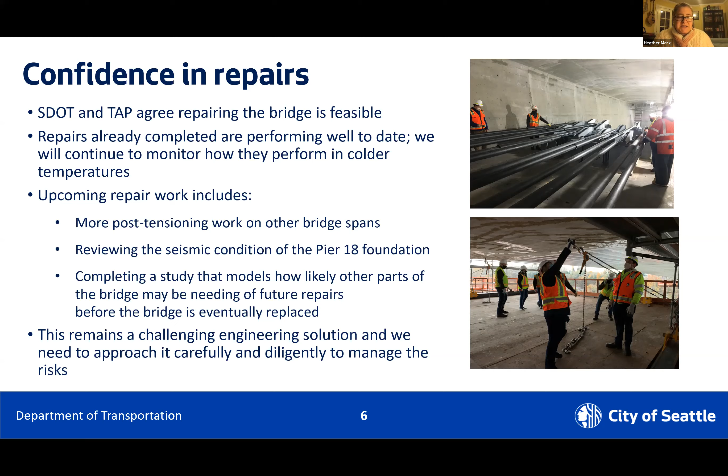SDOT is going to begin the alternatives analysis, that first stage of the type, size, and location effort we'll engage in. It's critical now to maintain the low bridge and other key infrastructure as we move into the serious repair. The city is also advocating for redundant modes of travel in and out of West Seattle, and we'll be working with our friends at Sound Transit to talk about how their bridge and our bridge may complement one another.

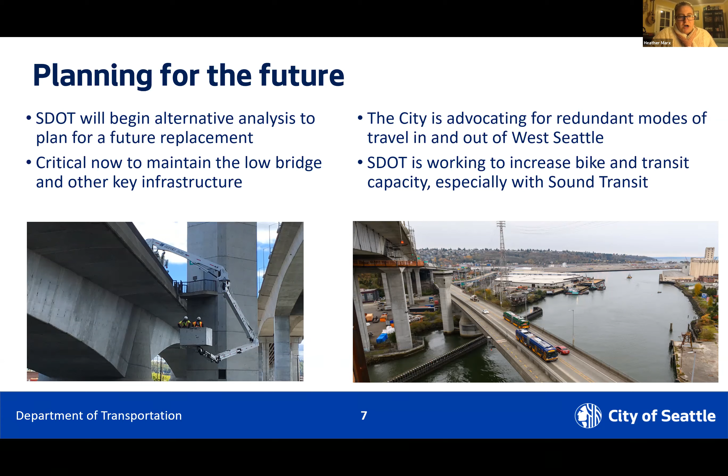You see some pictures here. The first is a picture of what we call a UBIT, which stands for Under Bridge Inspection Truck. It's a pretty cool piece of machinery that has an arm that reaches out and underneath so we can do that eyes-on inspection. And then a photograph of the low bridge with buses going across it, and you can also see where the platforms are that we've performed some of that carbon fiber reinforced polymer wrap work.

I'm very happy now to answer any questions you have with varying degrees of candor. Once we wrap up this element, we'll move on to talking about West Marginal Way. So, are there any questions? I don't have anything yet.

Well, Kate, you know you can count on me to come back, and you know how to get in touch with me if you have a question. Actually, I will jump in if nobody else has one. The ramps and the Spokane Street Viaduct, what's the lifespan on those parts that connect to the bridge?

The Spokane Street Viaduct, the ramp that connects it to the high bridge, just all the connecting bridges that get you to and from. Yes, generally we design bridges for a 75-year lifespan. If I were a structural engineer, I could be a lot more specific about that. The Spokane Street Viaduct was recently widened, and as part of that project, I am confident they made some additional strengthening to make sure it could carry that additional load of the wider structure.

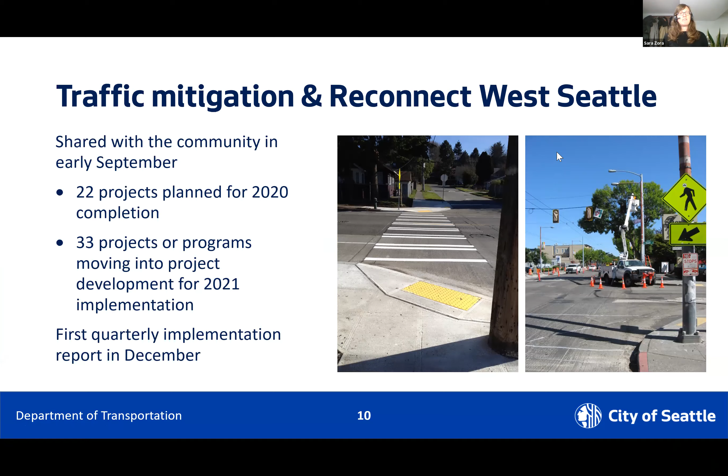Okay, so we're here to talk about West Marginal Way. Michael, I know you had talked about volumes and speeds. I looked back and saw that we hadn't really talked a lot about West Marginal Way as a whole with this committee, so I'm here to do a little bit more than just volumes and speeds. As you guys know, West Marginal Way is a pretty critical corridor right now.

It is one of the detour routes from the closure of the High Bridge. There are very significant challenges with this corridor: very high speeds, a need for better safe accessibility and access to the Duwamish Longhouse, issues at the West Marginal Way and Highland Park Way intersection, and concerns from freight communities about access to and from their businesses, especially on the riverside, the east side of the corridor. There are also some missing links in the pedestrian and bicycle infrastructure and network that we're looking to connect.

I would like to remind you that since that closure has occurred, we have seen volumes increase here as well as speeds. The five-way intersection really is still that constraining factor for that southbound movement from the five-way—there's just that one lane and then it opens up into two. I'll get into some of the existing conditions as we move forward.

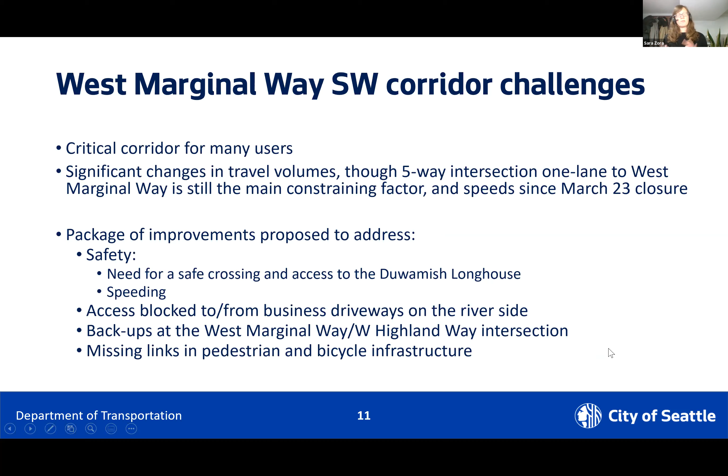Next slide, please. So we have some things that are definitely coming in and have already been installed in 2020, and there are some things coming in 2021, and some things still being discussed that potentially could come in 2021.

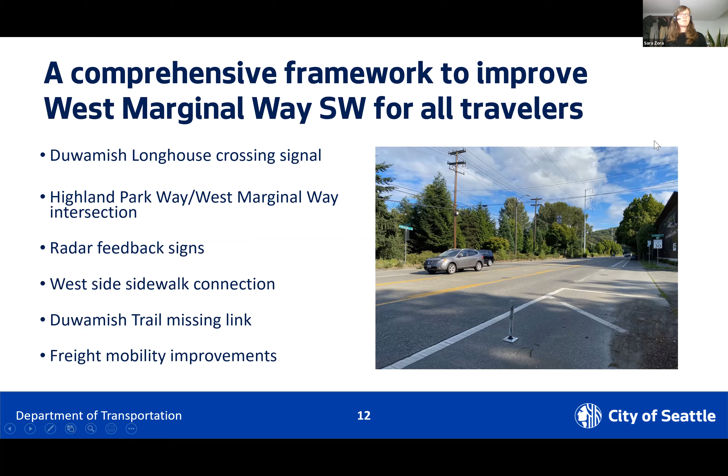So, next slide—the first thing I wanted to talk about was the Duwamish Longhouse crossing signal. This has been a pretty important project for the Duwamish for quite some time now, as you can see from the history on this slide. They have events there, parking isn't very accessible, except for the lane drop that we built out in 2019.

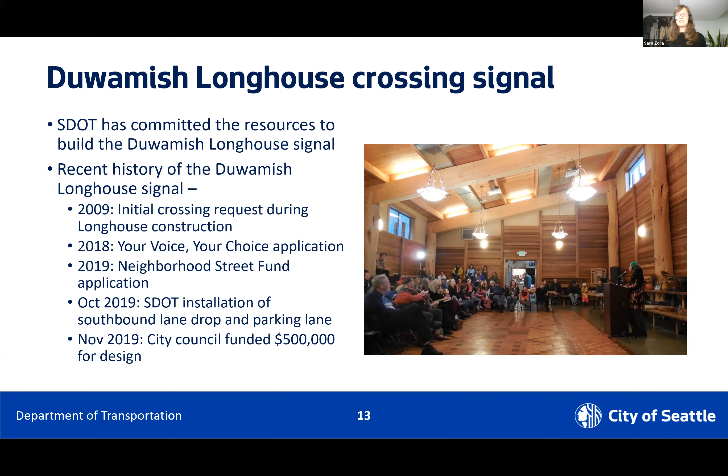Through Reconnect West Seattle, we have committed to funding both the interim and the permanent signal. There will be an interim signal that we have a huge desire to build in 2021, which would really increase safe accessibility to the Duwamish Longhouse across West Marginal Way. They have some parking on the east side, and we hope there will be a permanent installation for the signal in 2022. So that's one thing definitely coming up in 2021, that interim signal, which is a really huge benefit for the Duwamish Longhouse.

I just saw Deb's comment in the chat that City Council actually committed to funding this. We were committing to funding it out of Reconnect West Seattle funding, and now I think there's actually more funding for it from City Council today. As you know, they do their final budget, I think this coming Monday. It's very interesting, and we love that this is going to be definitely funded and provide some good safety for people coming to that cultural center.

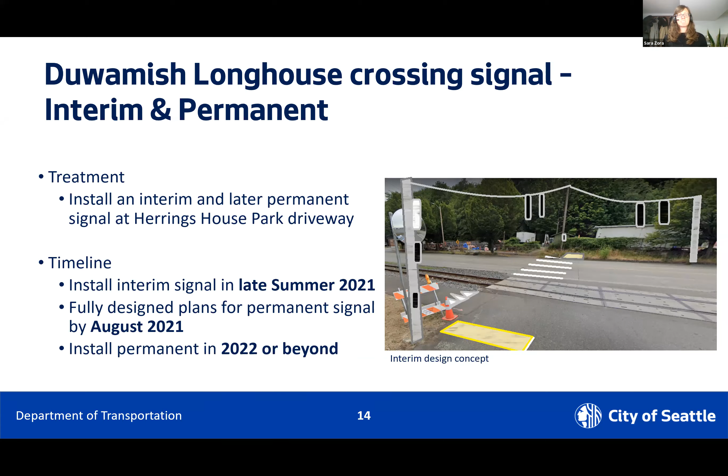We have completed two different projects in 2020 so far. We have installed six radar feedback signs. As you know, one of the challenges on this street is pretty high levels of speed, so that was one of our ways to try to educate people about how fast they're going and make sure they understand the speed limits, as we have reduced that speed as well.

We have also done some interim intersection improvements at the Highland Park and West Marginal Way intersection. We have redone the channelization at the intersection of Highland Park going eastbound, passing through the Duwamish. So we now have a right turn lane and two through lanes, and we have some after studies coming on what that looks like, to see how efficient we've been able to make that intersection flow a little bit better for motorists.

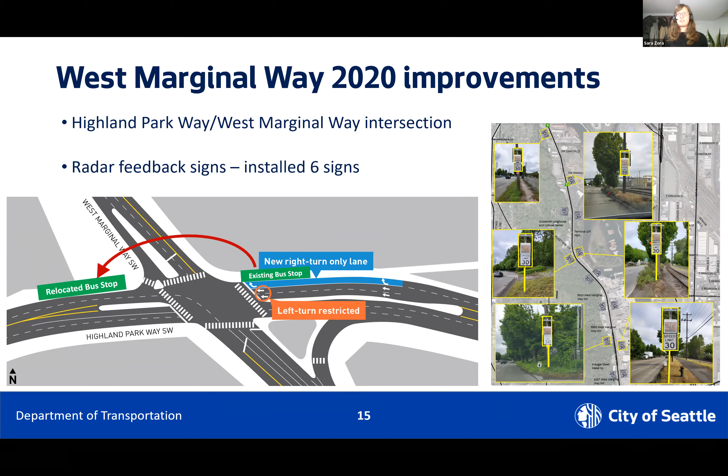In 2021, we will be looking at all the concrete — the non-engineered term I use is pork chops, you know, all the concrete rises that you see in the picture — just to see if there's any more efficiencies we can deliver at this intersection, being one of the major detour route intersections that we have been carefully monitoring.

So here's some of the 2021 improvements. We are committed to doing this west side walkway connection. If you look at the map on the right side of the screen, it goes from the existing half signal just south of South Idaho Street to the Duwamish Longhouse. This is a really important part. Right now, if you look at the picture, it's kind of like a goat trail — there's not a good, safe, accessible place to walk. So that is one of our commitments to building in 2021.

The things still in discussion and under more analysis are what to do with the roadway itself. We have two more things we were trying to commit to in order to get connectivity for our most vulnerable users, those walking and biking, and then some freight mobility improvements. We had proposed a northbound freight access, a FAB lane — a freight and bus lane, kind of like a transit lane — but we have taken that off the table. It didn't really interest a lot of people, and people were quite concerned about it. We are still working with the entities along both sides of the corridor to see if there are different freight mobility improvements we can make, especially in terms of safe access in and out of the West Marginal Way businesses on the east side where larger trucks come in.

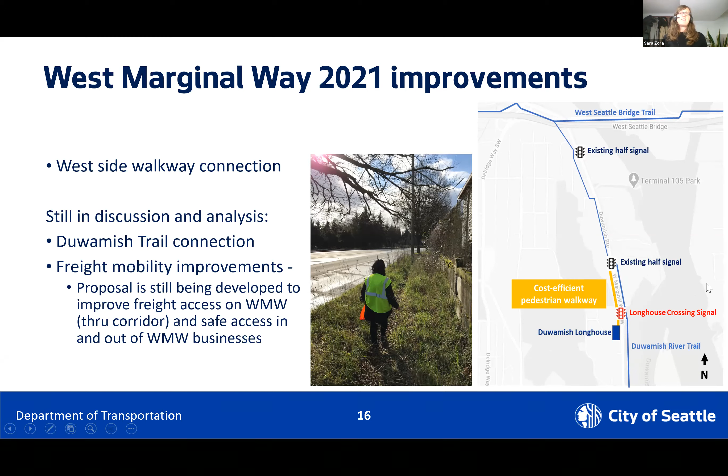If you go to the next slide, I did want to talk to you guys about what's happening right now with the existing conditions for the southbound travel lanes. I'm really going to focus on southbound travel lanes right now because that's where the proposal is causing some of the greater conversation, I'll say. So right now, the lane drop that occurs, as you can see with the delineator posts and the paint, is really coming up at the corner of around South Alaska Street. This is really where we have the lane drop that goes from two lanes to one lane.

If you go to the next slide, Madison, you'll see that starting at the north end of the corridor at the 5-way intersection, we have that constraint of just one southbound lane up until the first existing half signal. Then the southbound lanes open up into 2 southbound travel lanes, and at the next existing half signal going southbound on South Idaho Street, it starts to merge about 100-200 feet after that into the lane drop situation, which was put in back in 2019.

This was done for some ability to have different bus and ADA parking along the Duwamish Longhouse, and some better accessibility and safety for them to get in and out of their driveway, which is in the picture right here.

After that, it opens up again into 2 lanes for about 1.5 to 2 miles until you get to the major intersection at Highland Park Way and West Marginal Way. So that's the existing conditions we're looking at.

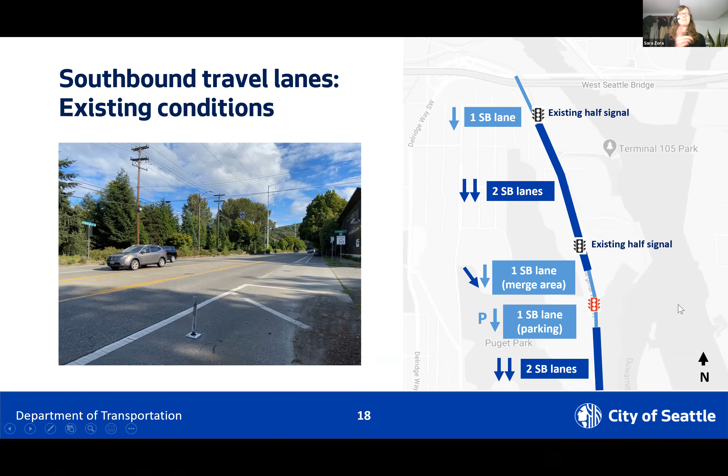If you go to the next slide, Madison, this is the original proposal that we brought to the Community Task Force. This was something that was highly recommended in our Mobility Action Survey that we did prior to Labor Day, when we were trying to collect information from the community about what it would take for them to change their mode, if willing and able, while still maintaining a lot of mobility within West Seattle.

This was a 2-way protected bike lane that would convert that outside southbound lane into a bike facility, so we can connect from the existing half signal, which is where the Duwamish Trail ends on the east side of the street, cross them over to the west side, and get them up to that next half signal, so we have some safe bike connectivity, especially if you're trying to get to the West Seattle Bridge Trail.

If you go to the next slide.

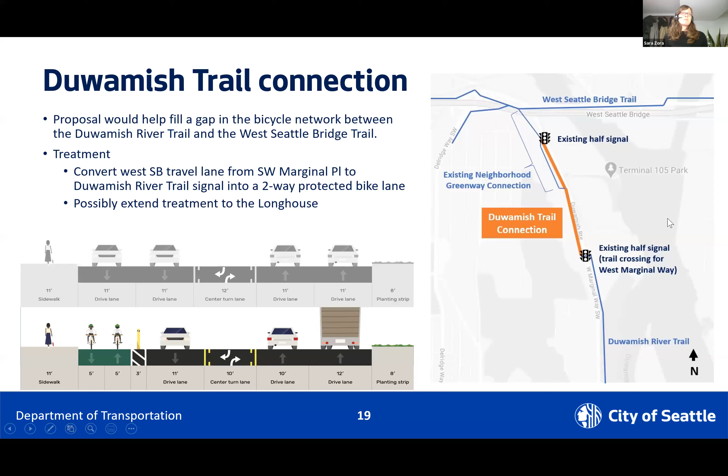Now there's some follow-up ideas. We've been hearing concern about taking that outside lane and going from a 2-lane to a 1-lane situation. We've also heard that if we have something in the roadway on that outside lane to the existing half signal, should we extend that to the upcoming Duwamish Longhouse signal, so there's not another gap of unusable space, since that's exactly where the lane drop occurs right now. So we're still open to ideas about bike connectivity in this area.

If you have ideas or something else to consider, we've looked at different alternatives. Some things are way out of the cost range, like extending the Duwamish Trail on the east side, because BNSF has their rail lines there. And what would we do with that space if a two-way protected bike lane is not installed?

So these are some of the questions. I hope that if there are any willing participants who'd like to share their thoughts, I would love to hear them. But I just want people to know that we're still definitely in a listening mode for this portion of the project, regarding what to do, if anything, to change the roadway channelization.

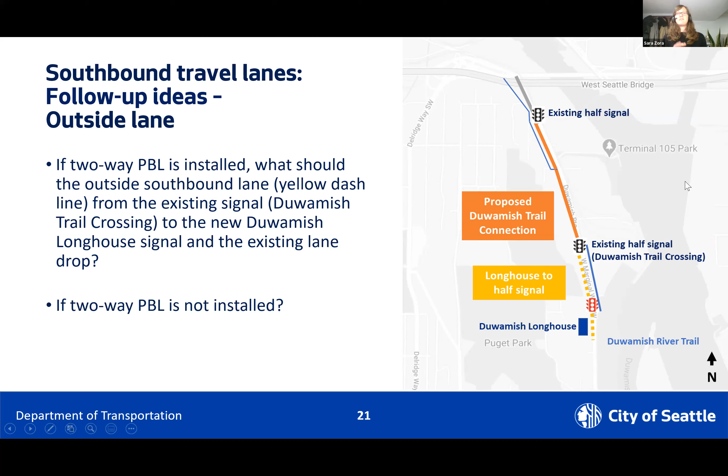If you go to the next slide, we do have some more data collection coming. We have the tubes out on West Marginal Way right now to do before-and-after studies, especially as we're installing these radar feedback signs. The after-study results we do not have yet; we're still collecting that data.

I'll be able to share that at your meeting in January if you'd like us to come back. We are doing additional engagement, including targeted surveys and outreach along the corridor for specific entities that have property right there.

We're going to try to invite our community task force to do a walk along the corridor to make sure we have a better understanding from that group's perspective of the different challenges we're seeing in that corridor, plus some broader engagement such as this meeting. We're coming with a greater communication plan for the whole West Seattle Bridge program into 2021.

After we hear from more people, we'll get back into some of the potential options for what that roadway or connections could look like. I do have Trevor here as well so he can answer questions about the speed limit reduction information, as well as questions regarding operations of West Marginal Way.

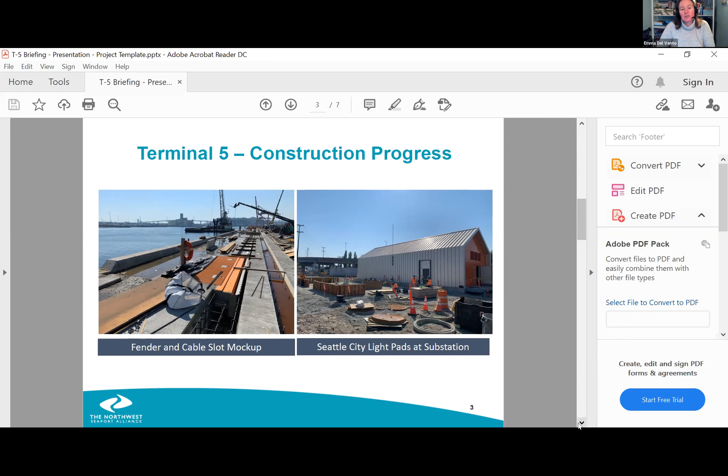So as we move on to the third slide, there are some recent photos. On the left-hand side, you can see some of the activity at the wharf, right on the waterfront there, where they're looking to put in the fender system and the cable slot for the crane. On the right-hand side is the gleaming new primary substation building, and next to it, as the caption says, are the transformer pads for Seattle City Light to install the new transformers at the substation. Sorry if I got a little ahead of you there.

No, that's perfect, actually, that's really wonderful. Thanks, Mick. So the project has entered a really repetitive phase now on the north berth as the work moves from north to south along the wharf.

The general contractor is moving forward with the elements listed. The above water dock construction is moving forward on schedule. The two crane rails, land side and water side, are also on schedule, and then the electrical substation. There are also utility lines that are going to be updated running down the length of the dock. And for the in-water work, you might have noticed that in the last few weeks we have just started the toe wall pile driving in water.

For the upland improvement projects, we're looking at numerous enhancements to the gate, and the other components are the stormwater treatment system. We're at 90% design, expect to construct half of it in 2021 and the other half in 2022, and soon to break ground on the marine buildings in the next few months. There will be 2 marine buildings—we'll build one now and another later. And we will add power into the uplands for the refrigerated units.

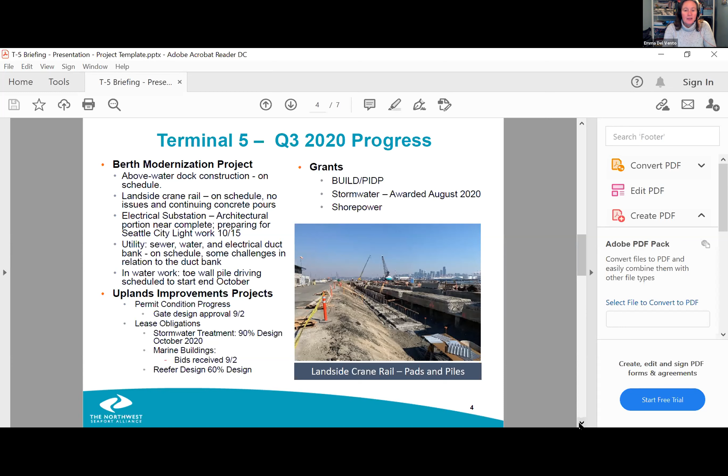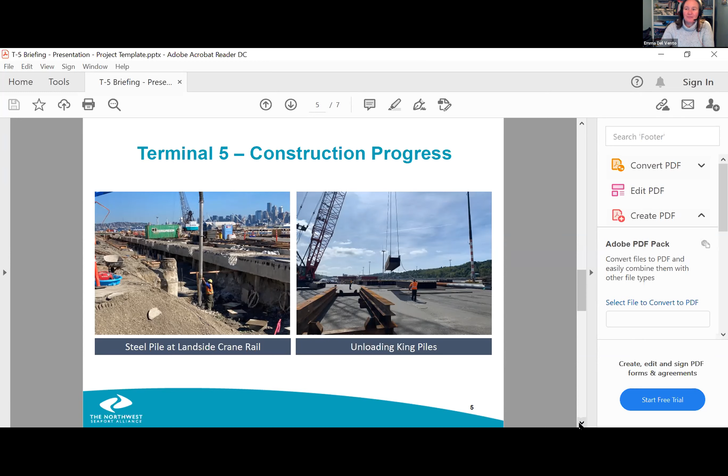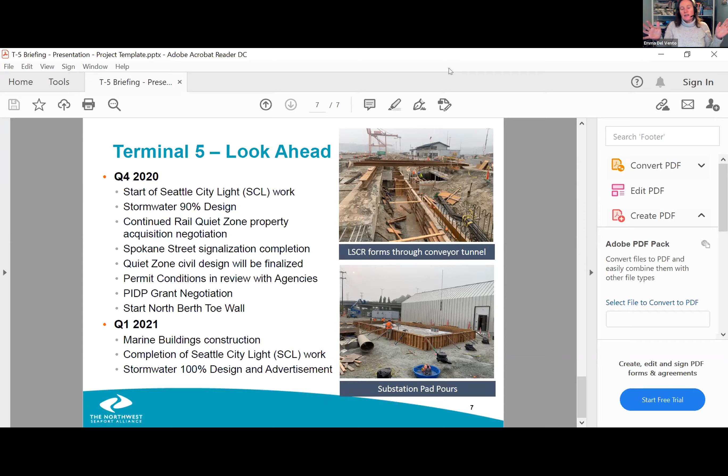Where's the location of the stormwater treatment facility? So there are going to be 4 main areas: 2 along the wharf, 1 near the entrance, and 1 on the north part of the terminal that are the main units. It will be comprehensive of the entire Terminal 5 property.

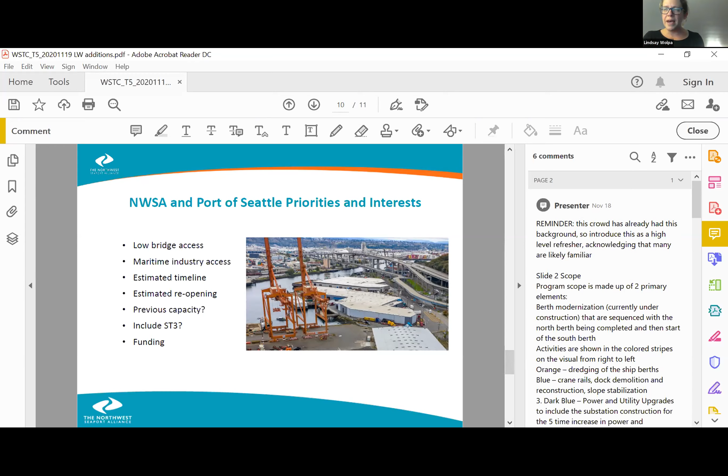Our commission, Seattle Commission President Steinbrueck, is an ex officio member of the CTF along with Deb. He's been at all those meetings and has been very involved. He attended the press conference this morning and we're participating in the subcommittee, so he was very enthusiastic and excited. You may have seen the statement from our co-chairs, Pierce County and Tacoma—we came together on this, and they're both really happy with the direction forward. I'll leave it there, and we're happy to answer questions.

I see Kate's question about how many trucks use it. Port trucks, the way it exists now, don't access the high bridge because it doesn't go directly into terminals. Coming off at the Admiral exit or the Delridge exit, you can't make that maneuver to get into Terminal 5 or Terminal 18. So they all take the lower bridge to get there. It won't be a difference in numbers because they'll continue to take the same route.

So not many trucks take the high bridge except to deliver to West Seattle and similar non-port trucks. Yeah, so those are all non-port.

People often assume, because we're out there doing this stuff, that freight trucks are all the same—but there's obviously the UPS trucks, delivery trucks, the ones going to restaurants or grocery stores, the Amazons coming to all our houses. Then there's the port trucks, the ones carrying 20-foot equivalents on the back, actually going in and out of the terminals. Those port trucks do not use the high bridge. As for other freight numbers, I don't have those—I'm sure my colleague Christine may have more details on the breakdown. There would be Nucor trucks, which are large, but those would typically carry metal, so they'll use the high bridge.